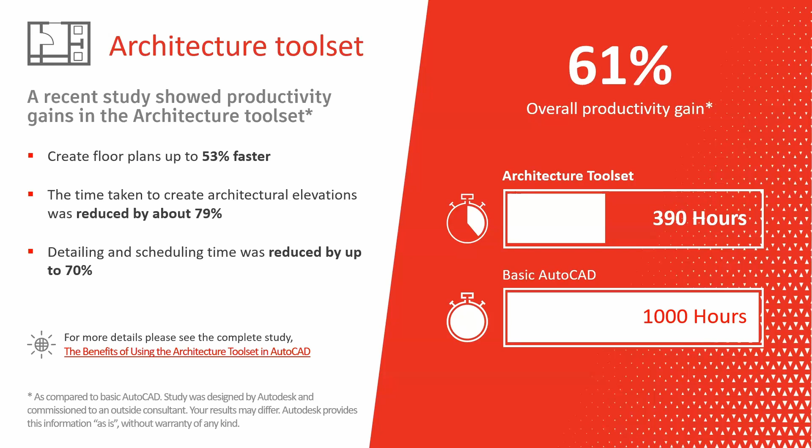So in case a company is mixed between these two worlds, construction and manufacturing, sometimes they need to create floor plans to put their machines in. It's good to have the industry specialized toolset because you have access to architecture tools and also mechanical things for your factory.

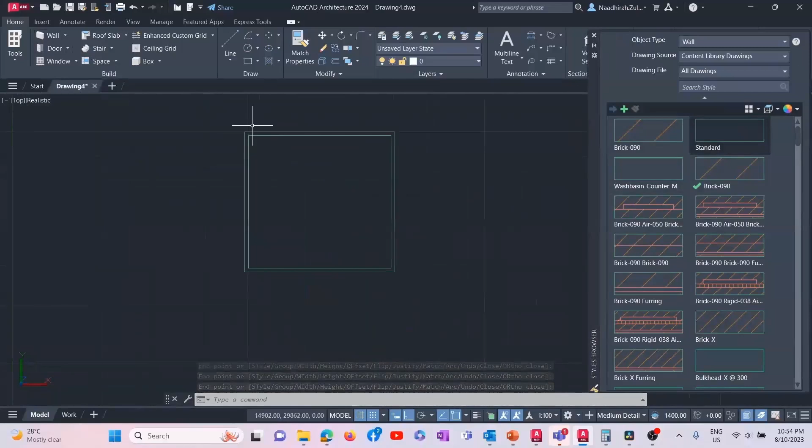So for example, this is the architecture toolset. Here you can see on top wall, doors, roof, slab, stairs, and all the libraries here in AutoCAD. You see the sizes of the door can all be arranged and changed, and there's a list of libraries.

Let's say you just want to put windows, put windows there inside. This is just like 2D, like you draw your 2D, but instead of putting in rectangles, you're putting in libraries, components. All of this is parametric, where you can change the size.

So let's say I add some internal wall. This one is the external wall, and then the internal wall is a bit thinner. You see there's auto trimming - when I add this door, it will be trimmed automatically.

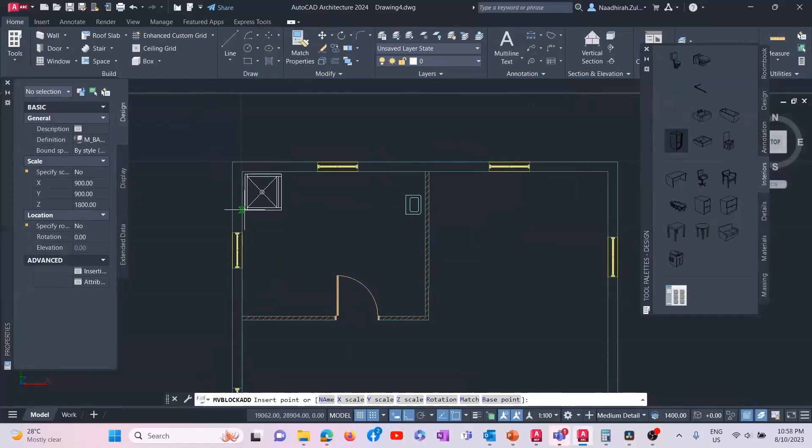And then put in some libraries. Let's say you're doing interior design or you want to add more details, you can also put in all these libraries, these so-called catalogs. They are online catalogs where you can browse for samples - for example, if you're building a toilet. All of this is available in the catalog, and from this 2D it's automatically converted into 3D.

So basically, when you're doing that 2D, it's automatically converted into 3D. This is just for floor plans - I won't go too detailed on construction and building. Just a simple floor plan, you can also get this, so you can put your machines in - whatever things related to your company in case you need a floor plan.

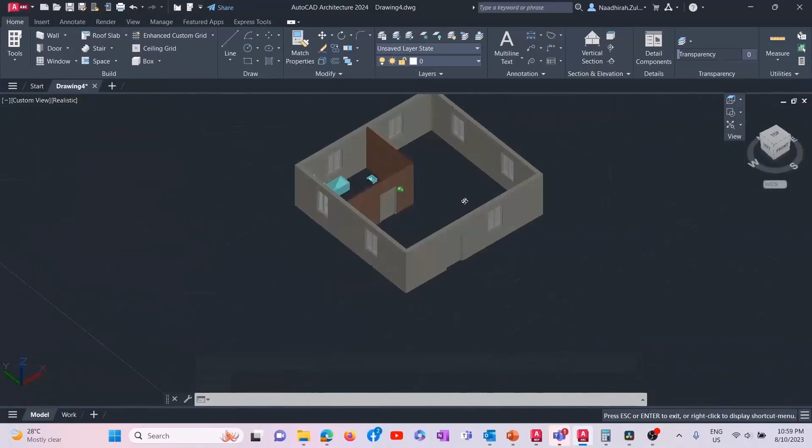Mechanical toolset. Now you get the concept of what AutoCAD industry specialized toolset is, right? Roughly understood a bit? All the features and functions are more tailored to the industry. Mechanical toolset can help you create GD&T dimensioning and all, which is more detailed than the normal AutoCAD LT. Standard libraries like bolts, screws, nuts are also available.

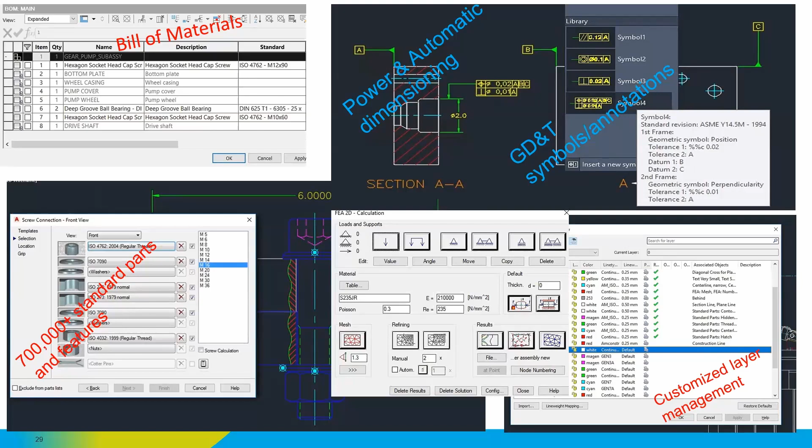You don't need to draw, everything is there. A simple calculation of load can be done, but it's in 2D, and automatic creation of bill of materials. If you use AutoCAD Mechanical, every part you put in, they will track. So later you can extract all the bill of materials or part list - you don't need to calculate manually. This is all, but AutoCAD Mechanical only has 2D.

So here is how it looks like. You can see up top here, it looks a bit similar, but they actually have things like contents, annotations, different. So let's say we go to view - here's the mechanical browser, like mechanical drawings. This is more like 2D, but mechanical drawings sometimes have multiple drawings inside as references.

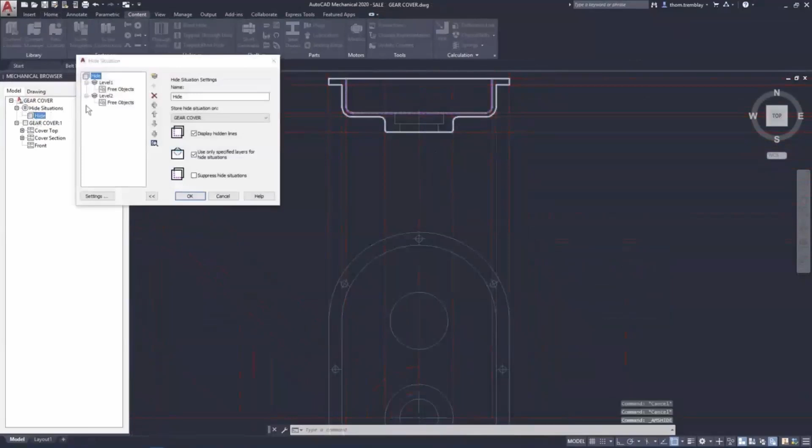They have their own browsers, so this can track like upper parts, upper assembly you put in, just for management purposes. And you see here there's more detail like construction lines - like hide situations, this is like automatic creation of drawings, mechanical drawings that have front and back, so the back can become a hidden line. AutoCAD Mechanical will help you automate that - you just tell it which one is front, which one is back, so it will automatically create the hidden lines. Let's say you move the two profiles around, it will automatically update too.

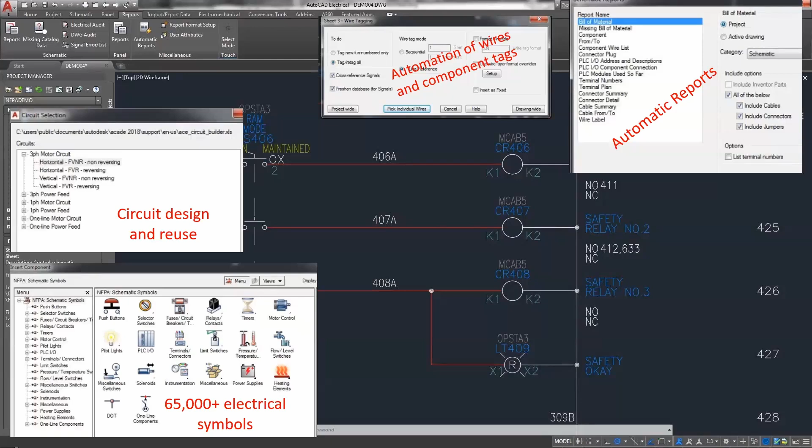Electrical toolset, same concept, but you have all this - libraries with maybe 65,000 or more electrical symbols. Later Nabil will show more details. There's automatic wire and component tags and wire tags here, and then automatic report.

Okay, and then Plant 3D, Nabil will cover Plant 3D, and also P&ID. So if you are doing plant or process or pipings, you maybe have to build schematic drawings. AutoCAD also has schematic drawings where you see everything schematics related, and all the libraries already there - pumps, compressors, all already there. This is Plant 3D. If you have AutoCAD full version, you have this. Just so you know or you don't know, this one.

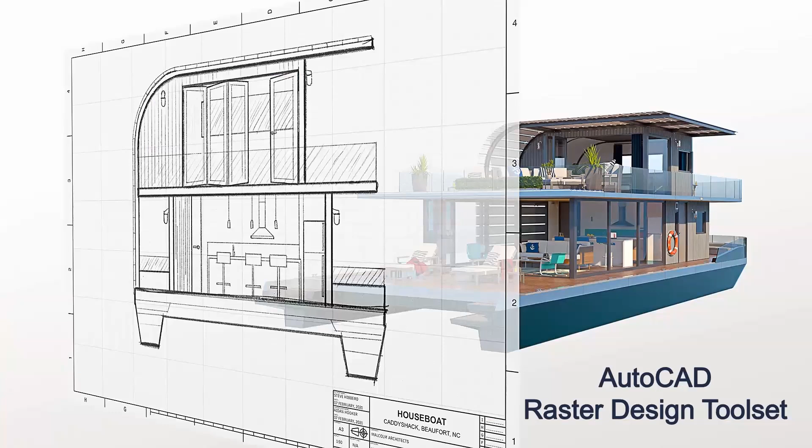Generations of ISO drawings. And then this is one where in the list of AutoCAD toolset, there are 7. This one is the least famous, the least famous nowadays, because it doesn't create drawings, but it actually restores drawings.

So let's say there are old, very old paper drawings that are damaged. Like if you've ever seen old drawings that are yellowed, the ink already cracked. So one way is we redraw everything. Usually we tell the intern, redraw. Give it to the intern, redraw.

It can't automatically convert because it's not a PDF from AutoCAD. You know AutoCAD can save to PDF right? This is not, this is from paper. You scan the paper, you can't automatically convert it. Plus the conditions are very bad, so you need to restore.

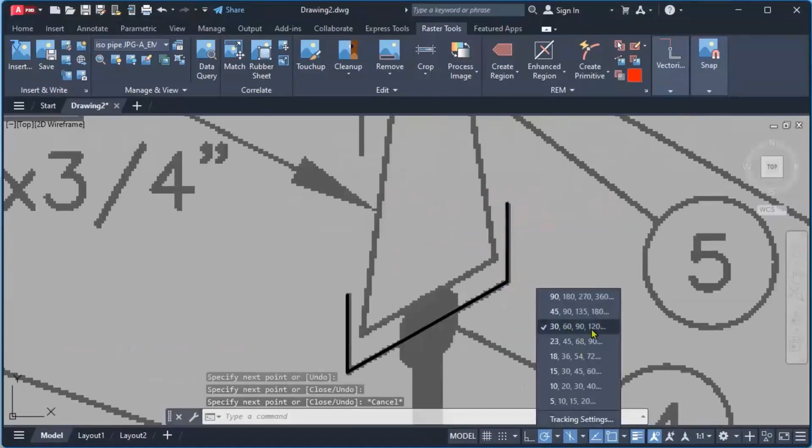Okay, a quick intro. This is from a scan drawing, a paper scan drawing. So Raster Design only helps you to detect all the endpoints. It detects the lines so it's easier for us to redraw back.

Sometimes we can automatically convert, there are options to convert too. We can convert the lines automatically, and text we can convert automatically to AutoCAD text. Some lines we can convert depending on the quality. Some we need to redraw, like in this case, we redraw. But we also have things like automatic convert.

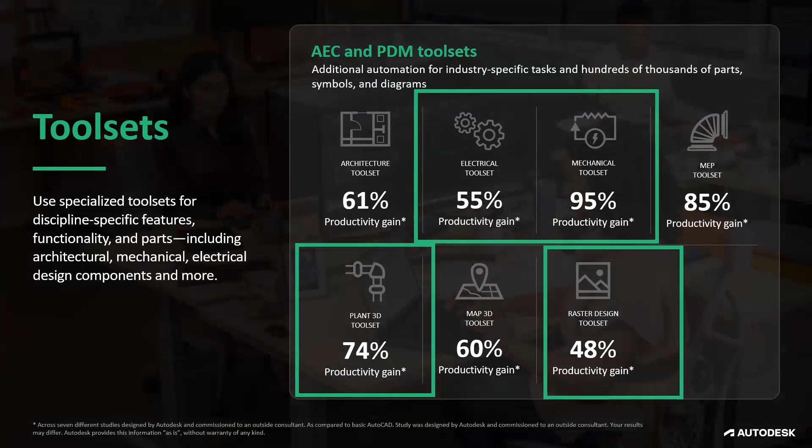So what this video is showing is one by one. So that is Raster. So in total we have 7 toolsets. So when you download and install AutoCAD, you have these 7, if you have the AutoCAD full version or AutoCAD industry specialized toolset. If you have LT, you don't see all this.

So how to use AutoCAD mobile and AutoCAD web? In case you want to know more, maybe we can talk separately later, because I already passed my time. So this is supposed to be a very quick overview only. In case you want to know more, we talk separately.

Okay. Questions? All good? Still okay? Yes.

Hand-drawn. So hand-drawn, if you use Raster, that hand-drawn you can scan as PNG. And some of it depends on the condition, if it's new. It should be - it's not auto-converting everything, but they can do the whole loop, you have to select which one to convert. You can't just select everything to convert.

Basically, if you have a 3D model created from Inventor, you can push it inside AutoCAD Plant 3D. I believe Seth already showed you the instructions for this. So this is one example. When you purchase the full AutoCAD, you get all of these specialized toolsets, and one of those I will share here is the Plant 3D toolset.

So why Plant 3D? I believe Seth also showed this. By all means, Plant 3D or piping design, you can actually create using normal AutoCAD. In the normal or full version of AutoCAD, you can also do 3D modeling, and you have the 2D tools to create schematic designs and so on.

But if you use Plant 3D, this will speed up the process of your creation for piping and so on. One benefit is an increase of 50% faster to create and modify, because most of the time there are tools or parts already provided that you can basically use.

You can also generate reports 66% faster, because the items included inside Plant 3D aren't just a model—you have information that you can fill in that can later be exported. So basically, these are the examples: you have 74% productivity gains.

For example, if you use AutoCAD to design a piping 3D model, it might take about 1,000 hours. In Plant 3D, this is reduced to 260 hours. So why does it save time?

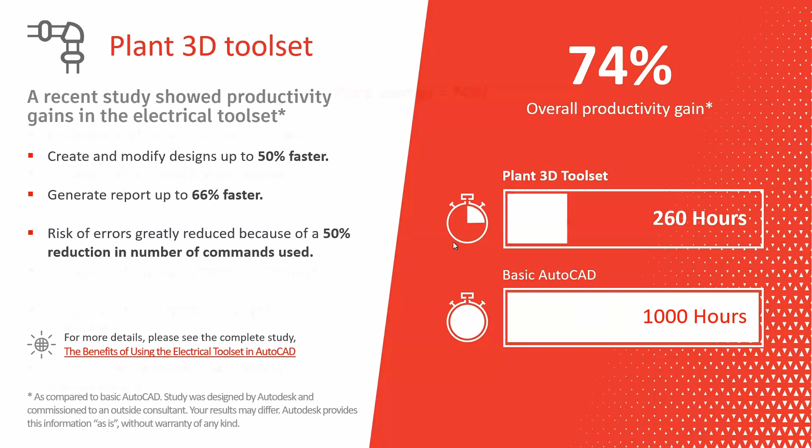This is just an example. First, we have the creation and modification of P&ID, which is the schematic 2D for the idea. By using this, you have a decrease of up to 42% in time.

When you create using P&ID, you can create it normally using normal AutoCAD to draw pipelines and so on. But for Plant 3D, they already provide tools you can just input directly—you don't have to create a sketch. You just fit in the icon, then use the line to indicate which piping connects to which area, and it will automatically do the process. You can create tags inside the line, so the lines and tools here have information that you can input. That's the first one.

The second one is the creation and modification of piping equipment and structures, which is an increase of about 50%. Again, you can create the 3D model, but same as with P&ID, you can click and drop only the part, and the piping is also easy to create—you just connect from one point to another point.

If you already have equipment included inside, you can just click at the nozzle point, and automatically it will create the lines. If you want to do some editing, this is also very quick to use—you can just pick one point, move it to the other, and automatically the pipeline will be fixed and fill in the interior.

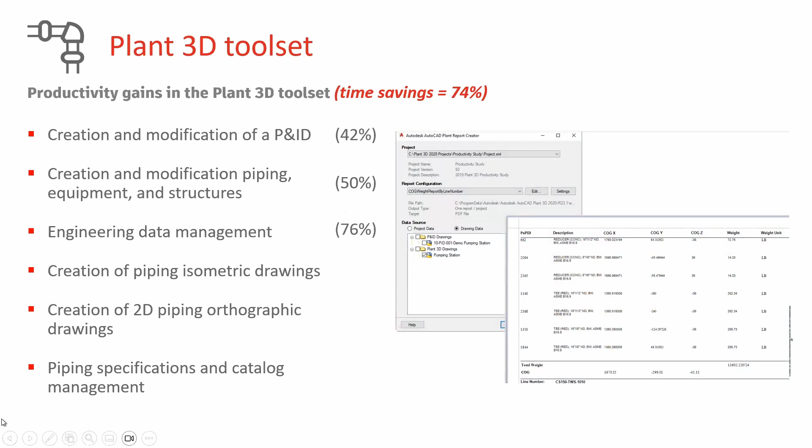Next, we have engineering data management, which is about a 76% increase. Like I mentioned before, we have the information or data included. And not only that—if you create the schematic from P&ID for 2D for the idea...

Then you want to make it into 3D. From the 3D piping, you can actually bring out the information you had before. So we have the list of items that were input for the schematic, and then you can just drag and drop into the 3D. With this, the information and reports can be created much more easily.

And then over here, we have the piping isometric drawing. So for example, the 3D piping that we created before, you can also convert it back into 2D. So for the pipeline, it's usually very difficult to use P&ID because that one is only for the ID only, for the isometric. So you can generate from the 3D before, and you can extract the information that you want. For example, able to find the pipelines, and if you have the pipeline with different segments, you're able to export, and you're also able to generate the BOM list quickly. So that is for piping isometrics.

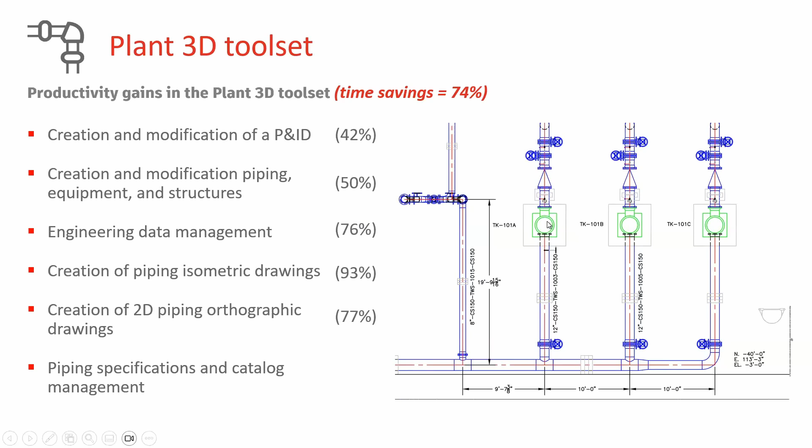So we have the same one with the 2D piping. This one is for orthographic. Basically isometric, and this one is orthographic. So you can also generate the BOM list for this.

And of course, for Plant 3D and P&ID, also comes with the piping specification and catalog management, where you already have that. Autodesk already provides the pipe, the tools, and so on, and you can just pick from there. If you want, we have the spec editor so you can add your own equipment, create your own equipment, then later on this one can be used directly inside AutoCAD Plant 3D.

Right, so pair it with Inventor. What does Inventor do? Plant 3D can do 3D modeling, and some of this equipment has already been provided, but Inventor can do much more detailed design, and it's much more quick and easy to create.

So one of the examples of using Inventor is that it has powerful 3D modeling design, so it's very flexible. Anything that you create, you have the history of what you've created before. So if you do sketching or editing, you have the history list that you can go back to and modify later on. That is something that AutoCAD cannot do.

The next one is the assembly level engineering tools. Inside AutoCAD, usually you design one part and all the parts get combined together. Whereas inside Inventor, you design parts separately - maybe part 1, part 2, part 3 - and then you can combine them into one single project file. And again, it can also generate the 2D drawing, but we can just leave that to Plant 3D.

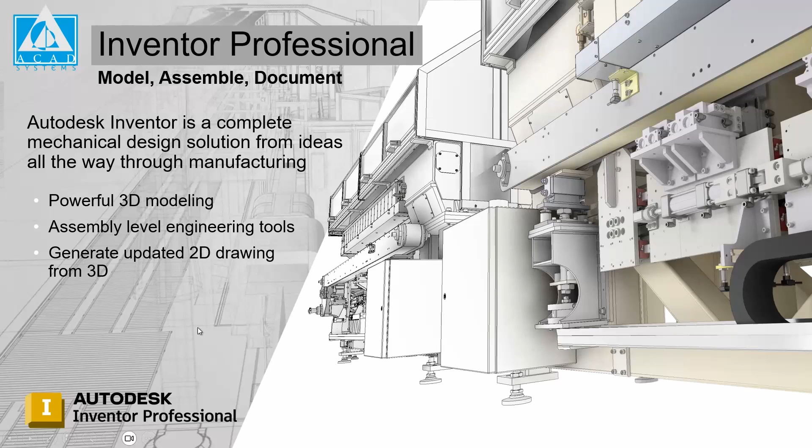And the next one is we have the frame design. Plant 3D also has something similar for frame design, more focused on structure, but in Inventor it's much more flexible - you can edit it easily. It also allows you to trace which beam member you have included.

And lastly is the tube and pipe. You can also do tube and pipe in Plant 3D, but for Inventor, sometimes when you design an equipment, that particular equipment needs to have a tube and pipe, so instead of doing that inside Plant 3D, you can do it early on with Inventor. As just an honorable mention, if you want to do weld design, Inventor also provides that. We have sheet metal and also cable and harness, but that's basically more on the electrical side.

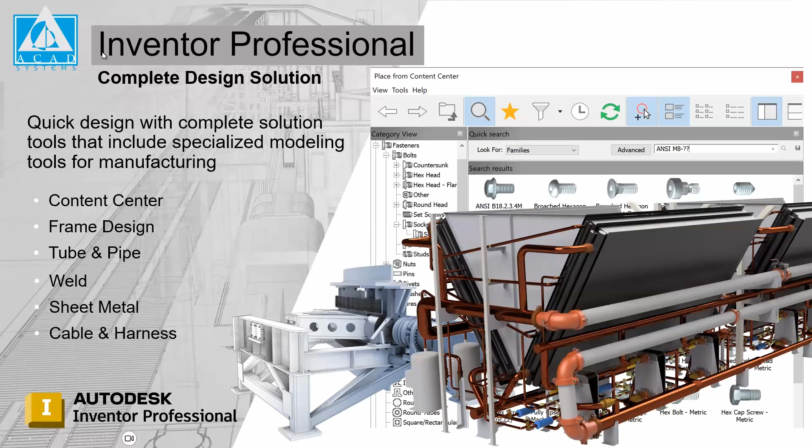To combine them together, we have BIM interoperability inside Inventor, which allows Inventor to take their models, compress them, and transfer them to different software. What it does is allow you to add some information inside, such as the auto beam object, and then configure it so it fits nicely into other software. You can also input configuration so that when you add this model into other software like Plant 3D, it knows which are the pipe locations, ducting, or electrical connections. That is some of the things BIM interoperability can do. Right now I'm just showing you examples.

For example, if you take a look here, we have a very complex model from Inventor. If you try to do this modeling inside of AutoCAD, it can be very difficult and very hard to create. But from Inventor, you already have all the tools required, so you just need to create and pick and drop.

But if I would like to bring everything here into Plant 3D, this can be very difficult because we have so many parts. For example, we have small parts, bolts, screws, nuts, electrical wiring, pneumatics. So most likely you don't want to bring everything.

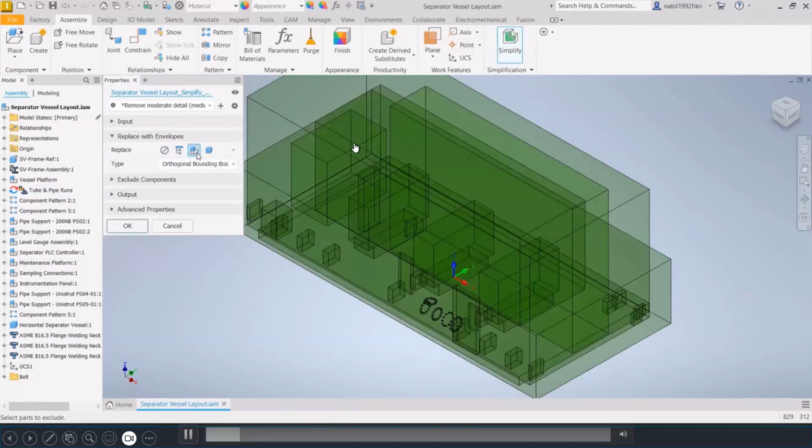For example, let's say I would like to convert everything into blocks, or maybe each part will be a separate block. So that is some of the things that you can configure.

Maybe I don't want that. I just want to remove some of these small parts. If you take a look, we have some railings, bolts, screws, nuts, very small parts. You can filter those out easily by using this exclude part by size option. You just need to include the size that you want to reduce. For example, 10 inches, so Inventor will find all the items less than 10 inches in size and remove them completely. So you don't have to select everything one by one.

But you also have the ability to select manually. I can just select some of the tools that I don't want to bring. If I find some mistakes, I can also undo that, so I can trace back what items I have excluded, and then bring it back.

So that is the remove parts feature. For example, if I would like to make it much more simple, I would like to remove some features, like holes or fillets. Inventor allows you to detect which areas have holes, which areas have fillets, and you can basically suppress them so it becomes much simpler.

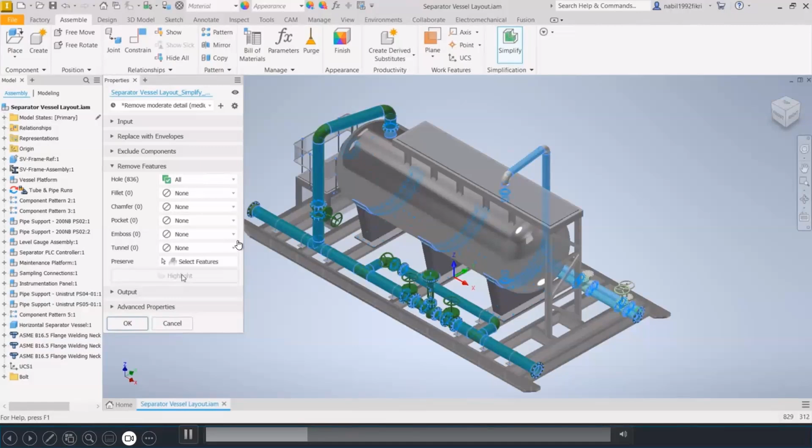For this case, I basically just simplify everything, but you can also preserve some of the areas that you want to keep. You can just select them.

Let me just skip this part here. So for the output, I can specify whether I want these to be separate parts, or I would like to make everything combined together into one solid object. But you can also do something like that.

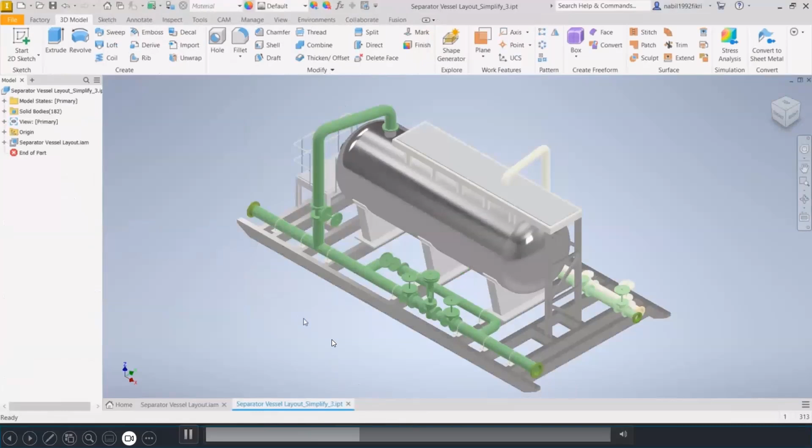Once I'm done, now the project is ready to be sent easily. Then I can just go and use the BIM interoperability that already exists inside of Inventor. Over here we have the BIM. If you take a look, we have the MEP connections, which allow you to select which equipment or parts have certain criteria.

For example, here I need to have piping, so I need to tell it that this model has piping. Later on, when I bring it inside Plant 3D, Plant 3D is able to detect the piping here, and I can easily create the pipe connection from it. From here I can input some information, like what type of piping this is for, and what the connection types are, and so on.

But this is basically just repetitive, let me just skip this part here. Basically, I'm doing the same thing.

Other things you can also configure for building components. For example, if I want to bring it into other software besides Plant 3D, I want to make sure that what I see here is exactly what I see inside of Plant 3D. Sometimes the orientation can be flipped, or the angle is not correct. So this is where you can configure it first, so that when it's included inside Plant 3D, it appears exactly how you expect.

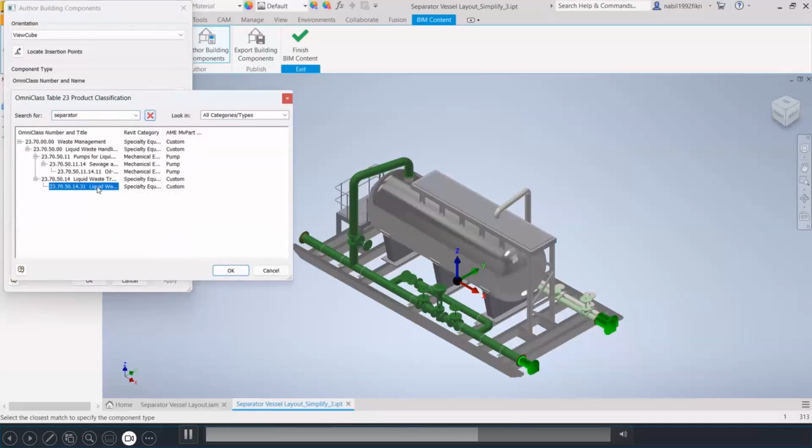You can also input the product classifications, and include other types of properties, maybe model properties, though for Plant 3D this might not be needed. I can also include descriptions, and this can be seen when I add it inside Plant 3D.

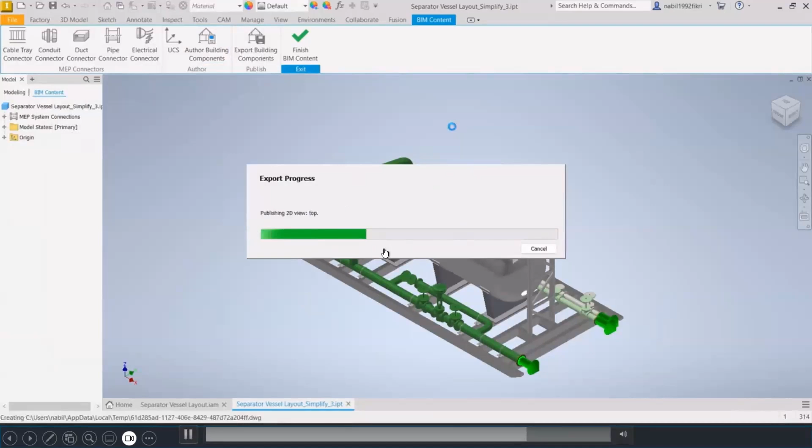So everything is done, I can exclude this component and export this building component here. Once you export, it will tell you the information you added before, automatically creating a report for you. This is useful since maybe the person receiving it isn't the same person who uses Plant 3D, so when I send it to other people who use Plant 3D, I can tell them what information I've added for this component.

You can see the report has been generated automatically. This is the list of information, so the next person who receives this knows exactly what you have done for the component.

The reason we want to simplify first is, first of all, to protect your components and your designs, and the other reason is to make the project lighter so it can easily be managed on other software.

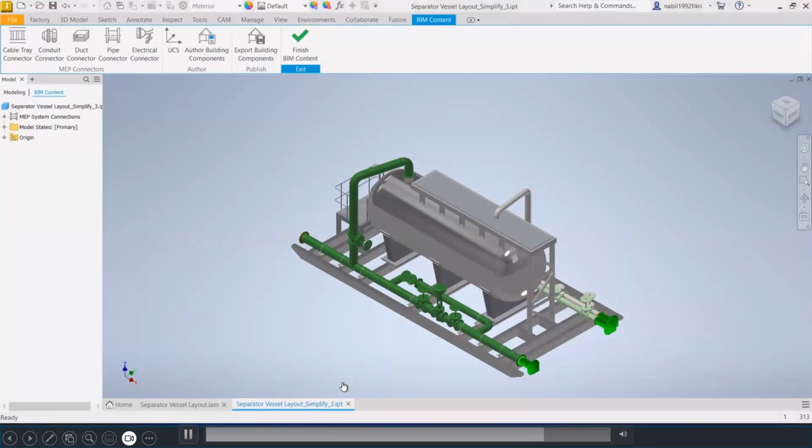From the plant itself, you can see we have piping, components, and equipment. These can be added easily using this tool palette here. We have the piping creation tool - you just pick and draw the line here, and it will automatically create a part.

The connection is also very easy. For now, let's say I want to bring back the Inventor files, so I can bring them from the Inventor equipment right here. You can see I'm able to add the component just the way I see it from Inventor. If I take a look here, it tells me the description of this item - we have this water separator that has been added from Inventor.

If I take a look at the piping locations I created before, Plant 3D is automatically able to detect that there are nozzles you can create from this area for the piping. The piping can be created automatically using the BIM.

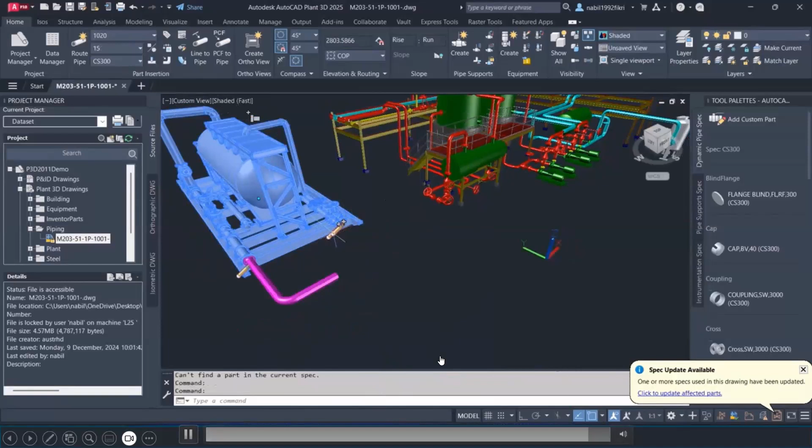So this one is just for the connection between Plant 3D and Inventor. Any questions so far about this session here?

Any questions about Plant 3D or maybe Inventor? I believe there are no questions so far, so we can proceed to the next part.

Before, we already took a look at Plant 3D, so now we take a look at the electrical side. What we want to do here is connect from electrical AutoCAD Electrical 2D into 3D design of mechanical with Inventor 3D. We want to connect these two. This one is also electrical, which is part of the AutoCAD specialized toolsets.

Again, why use electrical toolsets instead of AutoCAD? You will have very high productivity by using the electrical toolset. Most of the time, people who design schematic designs for electricals like to just bring the items and put the icon there instead of redrawing from the beginning.

So when using the electrical toolset, there's less need to create a sketch - you just need to create an icon and then put it inside. We have an 84% faster design creation because everything has been included, all the parts, all the icons, JIC, and so on. It's already been provided, so we have the library there.

You can also edit designs very quickly, and this is basically the productivity gain - around 95%. So instead of creating everything from scratch, you just pick and drop and you have the electrical design there. So how does the electrical toolset save time? First of all, we have the comprehensive symbol library.

The symbols are already provided. If you have your own symbol, you can create it and add it inside this library. You can see here we have the JIC, and you can also select between different types of symbol libraries, maybe NFPA, JIC, and so on - that one is already provided.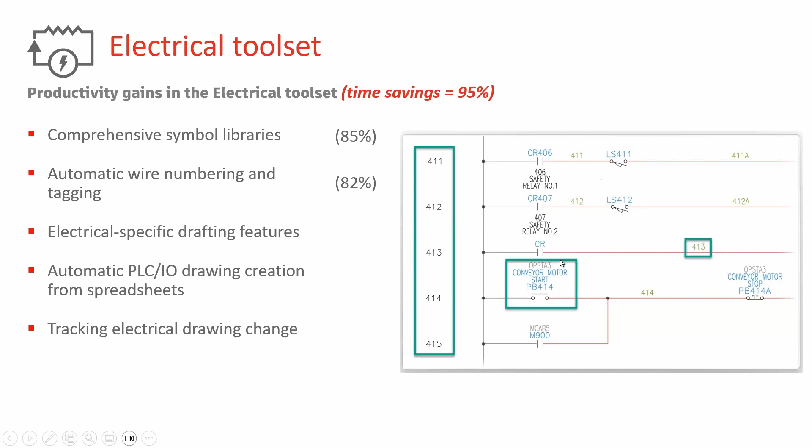Right, so we have automatic wire numbering and tagging. Most of the time when you create electrical, you just need, for example, this ladder here for wires. With the tools here, I just pick from the symbol library and drop it in, then add some information. Once the information has been added, the tagging automatically creates. For example, here we have the CR component, and it's also telling you which is the wire number based on this component item. So with this, we also have electrical specific drafting features.

Most of the time when using electrical toolsets, you will be less likely to rely on the regular version of AutoCAD sketch, because electrical has its own intelligent properties inside. So you can basically modify the tools that you have quickly.

And we also have automatic PLC drawing creation from spreadsheet. Basically, if you have data created from Excel files, you can bring it inside of electricals and it will generate this design of PLC automatically. You can also export it out if you want to.

And lastly, we have tracking electrical drawing changes. Usually, when using electricals, you create a project, and that project can consist of many types of drawings, let's say drawing 1, drawing 2, drawing 3. These drawings can be interconnected between each other. Some of the symbols may appear on drawing 1 and the same symbol on drawing 2, and this type of symbol is connected. So you can track this easily by using AutoCAD Electrical.

For example, here, if I have this component, I can trace where it's available from. I can see it's also available on a different sheet or maybe the same sheet. So we have a list of the data here.

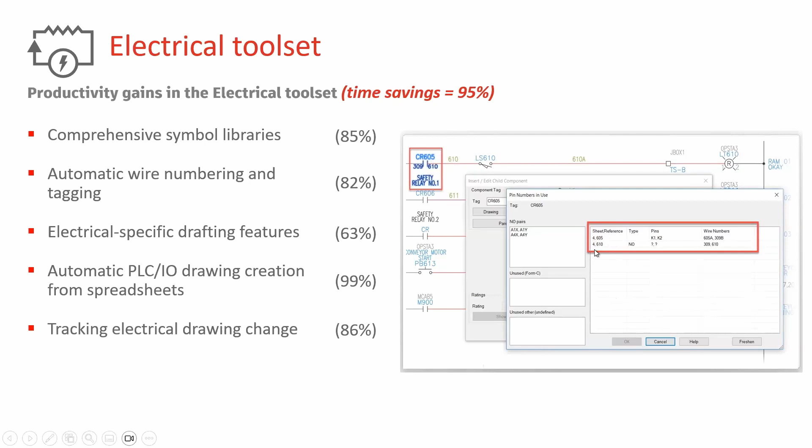Now, connected with Inventor. Inventor also comes with cable and harness, so you can do electrical design from AutoCAD, and you can also do electrical design from Inventor, where 2D drafting is created from AutoCAD Electrical for schematics and ideas, and to make it a reality is where you use Inventor. So this can work separately, actually.

But once you work separately, sometimes you want to merge or sync these two pieces of information together, and later on we can connect by using electromechanical. So what Inventor can do is create cable and harness, because cable and harness comes with a library of wires you can just use. We also have automatic routes - when you connect from one point to another to create a wire, you can end up with very messy designs, and this is where you can tidy up by using the automatic route, so the wiring follows a certain segment that you want it to go.

And then we have the nailboard environment. If you've used electrical before, usually what people did in the past is measure the line length - they would take the entire wire segment, put it into a board, and measure from that. So this one is just a harness library.

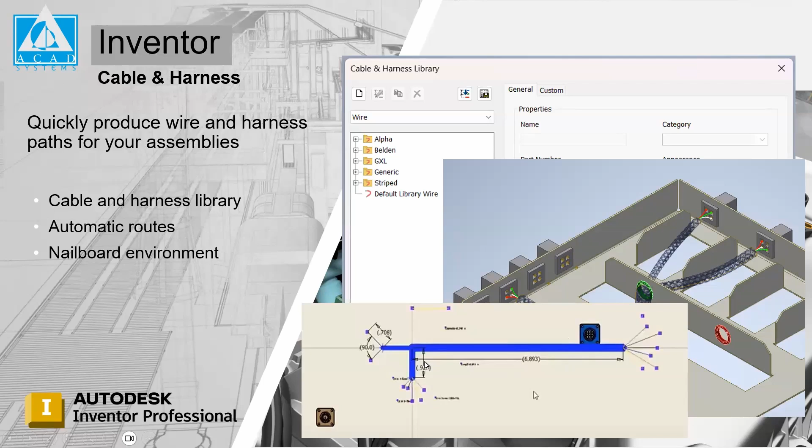Now, electromechanical - this is the tool that allows you to sync. It's available inside AutoCAD and also inside Inventor. It allows you to link two of the same components - maybe one you create as a schematic only on electricals, and the other, the same component, on 3D in Inventor. So you want a link between these two, and you can use electromechanical. Route cable is basically the Inventor 3D, and schematic is basically AutoCAD Electrical - you want to combine and merge these two.

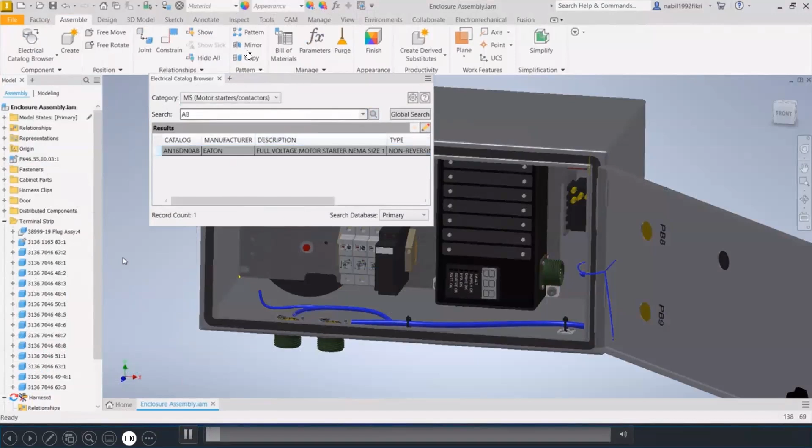Okay, so now let's look at an example using both AutoCAD Electrical and mechanical Inventor together. Here I have the mechanical parts, and I'd like to bring in some electrical components. You can find these from the AutoCAD Electrical libraries or the catalog browser. I can search by manufacturer, for example Allen Bradley, and just click and drop these items in.

If you don't have the model yet, you can also create your own model and then add it from the library. But for this time, it's just basically for assembly, so let me skip this part.

Next, I can go to the top here where we have the electromechanical link setup. What I do here is create a data link that can be read inside of AutoCAD. Let me skip this part, so for example, I save it on the document, and once I'm done, I'm able to see a library list of the items that I've synced.

If you take a look here, we have the location view, which shows the electromechanical parts. Here we have the Inventor parts, and it's able to tell you the list of what part is actually from Inventor or maybe from AutoCAD. I don't have an AutoCAD file yet, but what I can do is fill in the information so that it will have electrical properties inside. Let me put this part here.

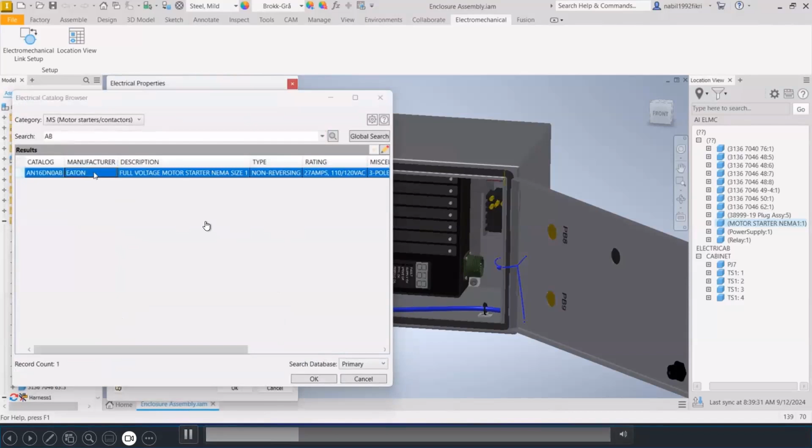This is basically just filling in the information, so I can trace back from the catalog, and automatically it will select the information about the catalog. Now what I do here is just save the link, save the sync.

So if I go back to the electrical one, we'll have the same tools. If you click here, this is the same tools that we have before inside of Inventor - we have the electromechanical link. I can create a new one from here, but for this case, we already created it from the Inventor side.

The electromechanical link basically works two ways - either you start from AutoCAD or you can start with Inventor first. Either way, I can just pick the data that I have from the Inventor, and you should have the same location that you see from here. So we have the parts from Inventor and from AutoCAD.

If you see here, we have the symbol for the Inventor part, and we also have the symbol here for the electrical part. This is the new part from Inventor that we just added, which is the motor starter here.

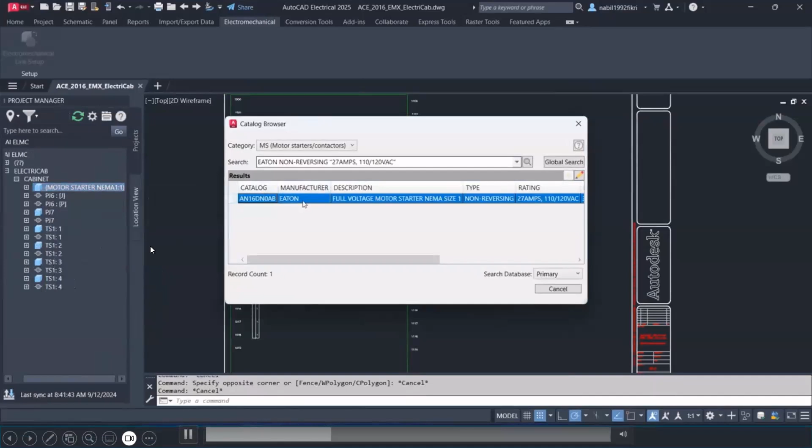I can also add a new component from AutoCAD Electrical, and bring it back to Inventor using this sync. This basically puts the motor starter inside for electrical, just to have a link between these two. So for example, if we have a motor starter here in Inventor, but once I put it inside of electrical, then you will see the link between these two.

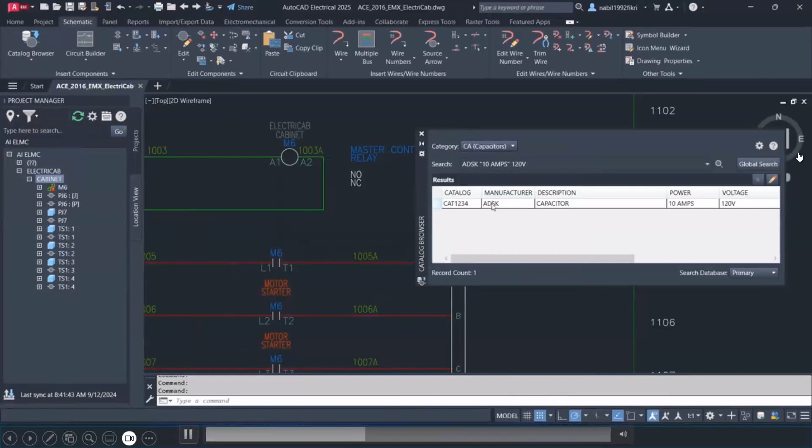So now electrical, AutoCAD, and mechanical are synced together. This is basically one part item. I can do the same thing - add a new part from AutoCAD Electrical, and go back into Inventor. Let me just skip this part here.

If you take a look here, this is basically what you do inside of electrical. You put an icon here, and this will be the list of information that you can input. Normally, if you try to do it using normal AutoCAD, you have something like this, but you need to create it manually - that's what we call an attribute, so you need to create everything. But for electrical, it's already provided - you just need to put in descriptions and catalog data, so this list is already available.

Okay, so the part has been included over here, so I can just go back to Inventor. Let me skip it. For Inventor here, I can sync, and now I'm able to see not only the Inventor part and the synced part, but I'm also able to see the electrical part now - the one that we synced before. So we have two symbols here - one for electricals, and one for the Inventor part.

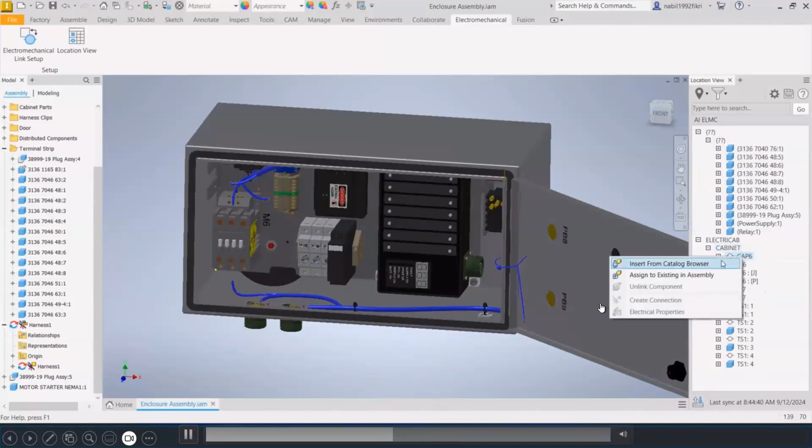If I want to, I can also bring electrical parts inside of Inventor, just like we did with the electrical from the Inventor part.

Okay, this one is basically just connecting. Let me just skip this part.

We do have the electrical part here as well, but it's not actually connected, one part. If you take a look here, we have the same item, PJ7, over here. We also have the PJ7 for the Inventor. We have PJ6 from the AutoCAD symbol, and we have PJ6 for the mechanical as well. So what we can do is link together between these two. For example, this electrical part here, I want to tell inside of Inventor this is the part that I want to link with the Inventor part.

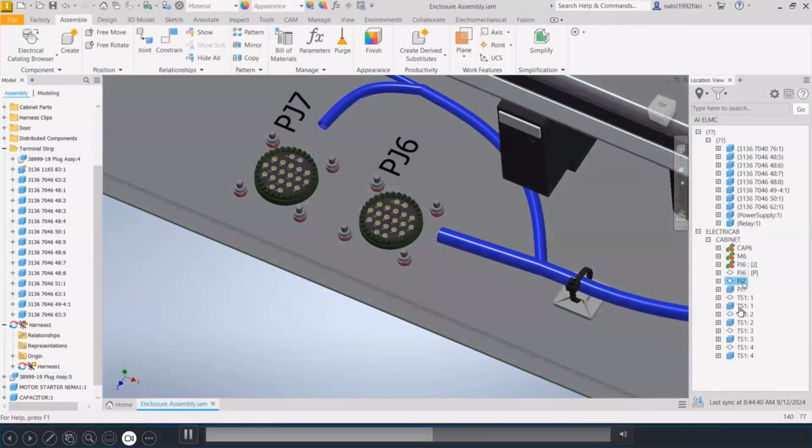So we have two PJ7s. I want to make sure it tells that both of this is actually one item. Now you see that we can actually link them together. I can do the same with the electrical part. This one I create from the Inventor, so I can go back to electricals because maybe I don't find that component inside of mechanical. So I can find that from electrical as well. I can find the Inventor parts, then I can link with the AutoCAD symbol here. So that is just linking between these two.

But if you take a look here, we still have some exclamation marks, which indicate there is still something not yet complete, right? So the electrical mechanical also allows you to trace whether you have finished the design or not. So anything you haven't finished will basically show you based on this icon here.

One example here that I haven't done is that we have the wire connector inside of AutoCAD Electrical, but we actually did not have yet this connector inside of Inventor. But this is something we can actually do easily.

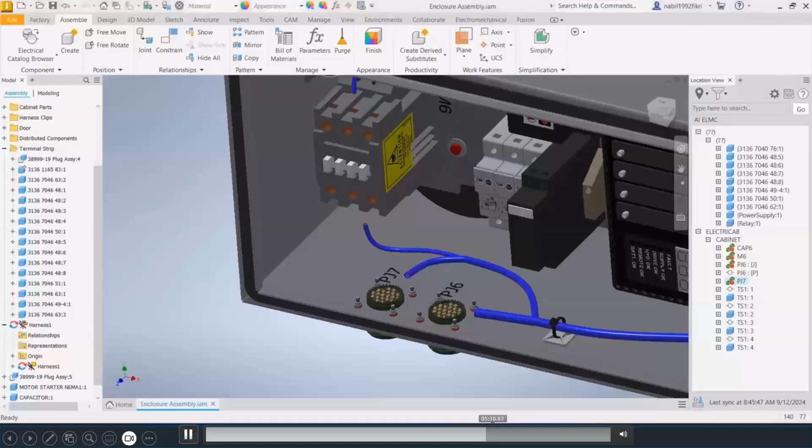So let me just skip to Inventor again. If you see here for the syncs, everything is synced together, connected. Now I just need to bring the information about the wire connections from the AutoCAD. So not only that, the single type of parts here also have a pin which allows you to connect wires to wires. So there is pin data inside, and the same with the Inventor and also electrical parts, it allows you to quickly create connections automatically.

So what happened here is that you can create this one manually, but this one I can just find the data from the AutoCAD, and Inventor allows you to route automatically between these two points. Basically, this is data that they actually read from AutoCAD Electrical, and then they just do it automatically for you.

You can also do that the same with the electrical part. For example, if I create new wires inside, then I can also bring it inside AutoCAD Electrical. If you take a look here, the wiring is quite messy inside of Inventor, but we can create wire segments to allow you to tidy up the wiring inside of this equipment here.

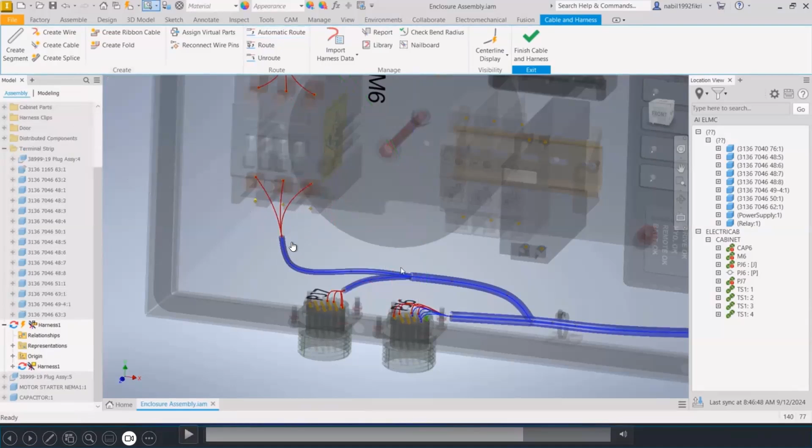For example here, we create the wire segment, the blue color here. This one is not just a wire, but a segment to ensure that the wire will follow inside the segment, and this can be done automatically. You just need to select the Automatic Route, and the wire will intelligently find the closest segment that it can follow and automatically go inside. But actually I did not select this one manually, this is automatic, we just put on the closest one.

So this is just an example from Inventor. If I want to create new wire, I can also do that. Inventor also provides the ability to create electrical design directly from Inventor without relying on AutoCAD Electrical as well. For example, I create this new wire here, and I can bring back this information inside AutoCAD Electrical.

Let me just move forward for the electrical part. So this one, I still have some error message here. I can use this detail or connection just to see what are the things that I'm missing, so you can trace back your error message easily from here.

Okay, so let me just go back to AutoCAD Electrical. So same again, I can do the automatic wirings inside, same as I did before inside of Inventor. So wiring, and you can see the wire is created automatically.

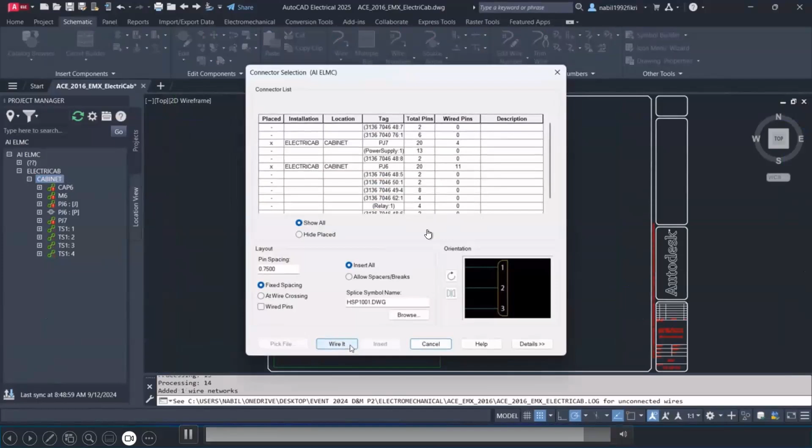Another thing you can do from here is bring data from Inventor. Inside AutoCAD Electrical, where you design a schematic, usually you don't know the actual length of the wire, because you just need to make sure what point connects to what point, just basically an idea. Inventor is where you make it a reality, where you can see the wire length, where you can see where the wire goes.

But once you sync, you're able to see the wire length from AutoCAD Electrical as well. For example, I need to bring the length from Inventor. Okay, so now I'm able to see the wire length, this is the information data from Inventor. So that is basically about the electrical mechanical designs.

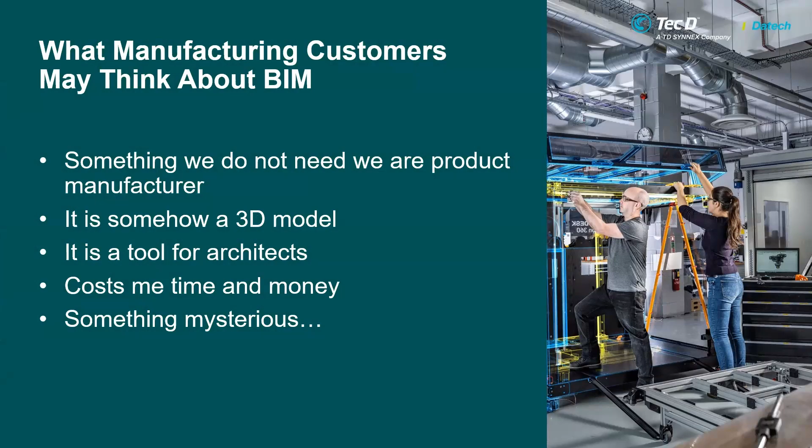Okay, BIM content. So what might manufacturer customers think about BIM? Usually, or previously, manufacturers think it's something they do not need, it's extra effort but they don't need it. It's somehow seen as a 3D model tool for architects only, not manufacturers. Just costs the manufacturer time and money, or maybe something mysterious. But I saw everyone's answer yes, so I assume everyone knows what BIM is. So what is the manufacturing component in BIM?

Okay, so things like building equipment or building products. Elevator, lift, HVAC system, this is also considered a building product. This is all designed and manufactured in a factory and installed in a building.

So you may wonder how your products or equipments relate to building. Just think of it like Lego. Your product needs to fit inside a building, and you need to make sure it's not clashing with any beam, any doors,

or any other building equipments. Custom fabrications, all this is manufactured. There are companies who manufacture this - all the custom facade, building equipment and layouts, all this steel inside a building or inside a factory with all these equipments, machineries. Modular constructions is also now a trend where people are building a whole set like a Lego and just put there. And then MEP engineering,

all the piping inside the buildings, like the waste management system of a building, where you throw rubbish and where the rubbish will go. And then inside a building also have things like the flow of aircon cooling. So like now the aircon is here - did it reach your side over there? Is it cold your side? So this is all considered as one part of manufacturing as well. Whoever supply the aircon needs to make sure that this aircon is cool enough to cover the whole room. So should it be placed here, placed there, or where is the most optimized location?

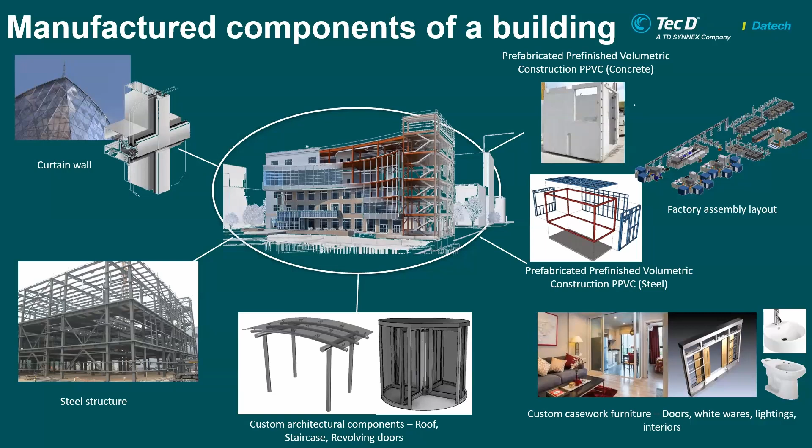So a bit more detail into a clearer example. Things like in a building, you have curtain walls - so all this is manufactured, right? Steel structures - there are companies who design, of course architects design structures, but it need to be manufactured and fabricated. So like custom architecture component, roof, staircase, doors, custom doors - all the doors here you see, this is all manufactured. Toilet, prefab - this is all manufactured.

Prefabrication and productization - so now you've seen earlier is prefabrications. This is a product, I mean people are actually selling this as one product. So this is a whole product, a whole set for maybe 5-story buildings to cover the range of power and cooling and so on.

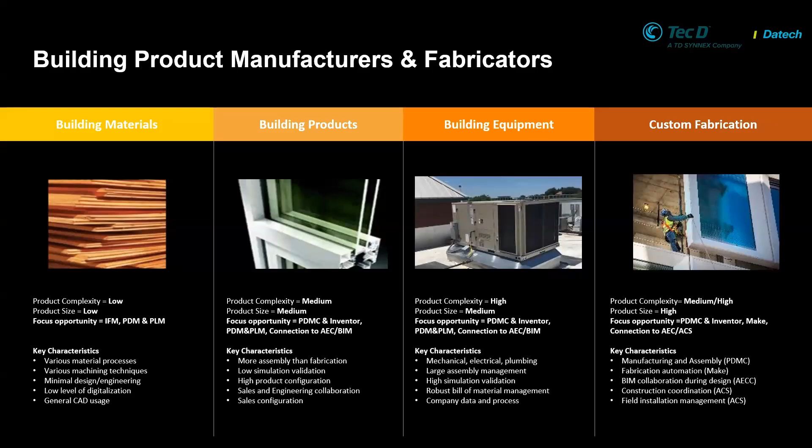If we go a bit more into details, so you can be under building materials, building products, building equipments, or even custom fabrications. So anyone in this field? At least touch a little bit here and there. Industrial machinery - so all your machines inside a building or a factory.

So now we go into Inventor. Do you know Inventor can open a lot of file formats? If you use Inventor, you probably clicked open before and saw a lot of file types. What is the difference between Inventor and other products? Other products also can open many file types. But Inventor has the technology called AnyCAD, where it can open all these file formats and maintain the associativity of that file format. So for example,

Nabil is modeling something, this equipment, with SolidWorks or other third-party software. So I use Inventor to open this. In the meantime, let's say Nabil is working on this component or equipment, updating something. Once he saves, me who opened this equipment in Inventor will also get an update. So that's an easy way to explain it. Inventor maintains the associativity - it's not converting, it's open and maintain the associativity.

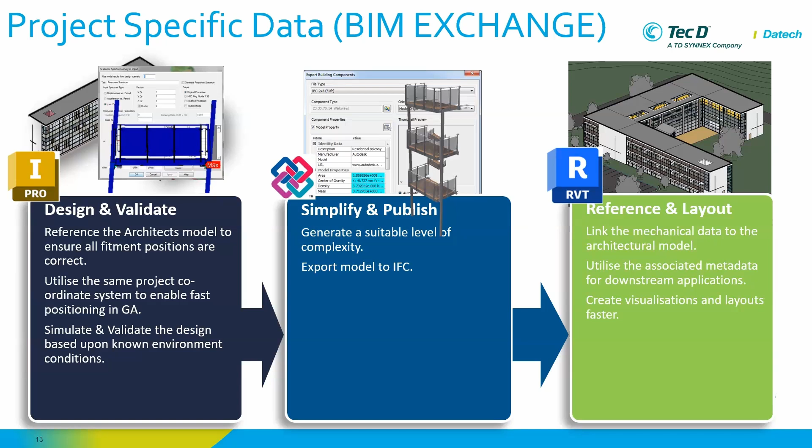Okay, let's say after we open up Revit and want to put in our equipment, we will not send everything. So as Nabil explained, you simplify, right? Before you send over or make it a Revit format, you need to simplify so that the file becomes lighter, because the architect or the Revit modeler does not need a very detailed model. They do not need to know how many screws are in the equipment, how many beams, whatever. They just need to know it comes as one piece, one assembly or one equipment. Simplify it, then reference it and send it over to Revit.

So there's also a thing called LOD, level of detail, where of course in Inventor our target is to make sure it's one-to-one, so every bolt, screw and nut is in. But in Revit it's different, we need to simplify it.

So you can treat Inventor as a medium to be in the workflow, or let's say if you use Inventor to design your equipment, it's much better. Why is it much better? We'll see more later.

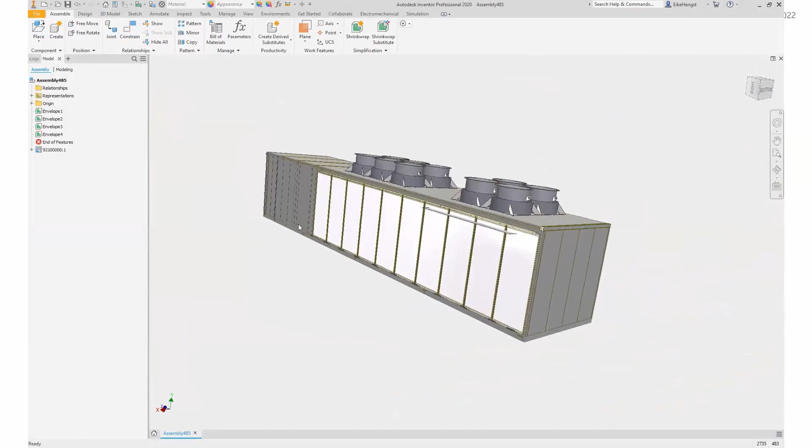Simplify and publish BIM content. So for example, this is our equipment. In Inventor, we just simplify the things, so we do not need to know how many panels are there. We simplify it to make sure that it's like just a box or envelope. We can just hide everything, so in Revit they do not need to know the details. We just got the shapes and also the inlet and outlet.

So in this case, the inlet and outlet are the pipe connectors. We specify where the pipe connectors are, the diameters, and the system type, so that all this will later be shown in Revit. So let's say this is unit return, and then of course we specify UCS as the origin, and then we can select the classification.

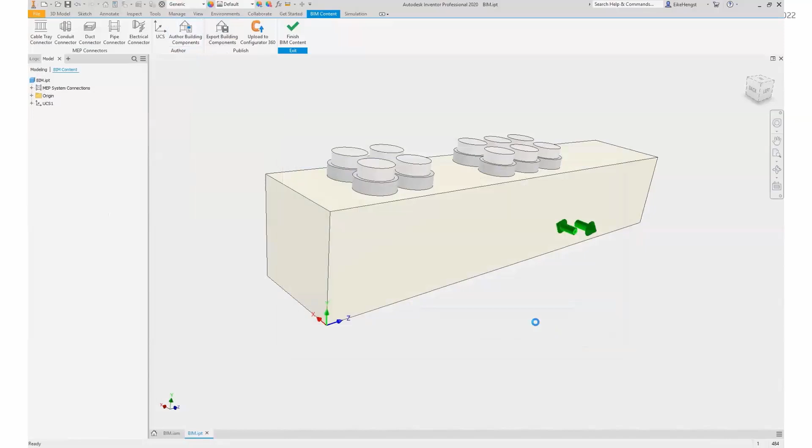Of course you can skip this, but if you want to add more details, you can also add more details here. In the case where you don't want to share too much information, you can just straight away skip this and export. So this is exporting to the file format RFA, the Revit family. So it's exporting, okay, so this is okay.

Now in Revit - so this is Revit. Let's say after we inserted the equipment just now, all this connector is usable. From Revit, we can insert pipes and everything, so it's not just one dummy shape there. It's an equipment that we can use in Revit. So that is one way where we send over our file as an RFA, or Revit family.

We can also use Revit to Inventor data exchange, where we can send over our Revit model, the building model, over the cloud. You don't have to save it locally, put it in a thumb drive and pass it over - you can send it over the cloud.

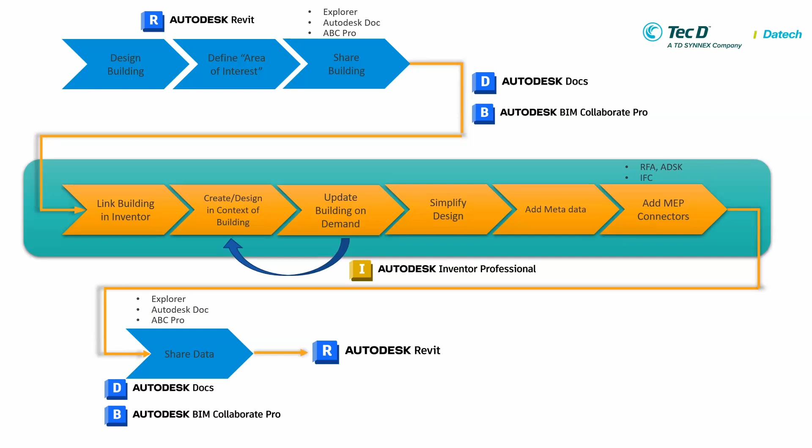Example, I believe most of you are in this blue box over here - this is the thing that I explained earlier. So let's say from Revit, they just need to define the area of interest. A building is very big, right, so you don't have to specify the whole building. You just specify the area of interest. Let's say I want to insert my lift inside this building - I do not need the porch, the room. We can just specify the area of interest and share only that area of interest. Then it comes into Inventor, we link it, insert our content, update, simplify all this, and then send it over back, all through the cloud.

Here is an example. This is called Revit Data Exchange, started in 2023. So from Revit, I can just specify the area of interest, save it to the cloud, and specify the area of interest - this is all in the cloud. Let's say we specify - this is a factory, by the way - so the area of interest is this. Save it to the cloud, to the location where we can collaborate.

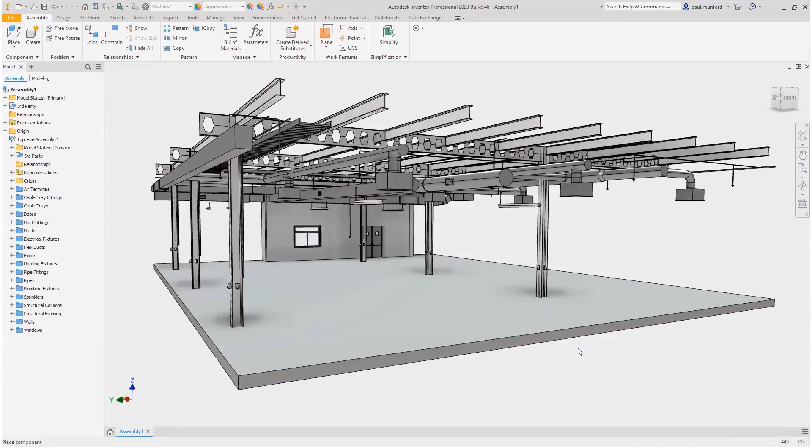So now from Inventor, I open it up also from the cloud. This is the area of interest that has been assigned to me, so I can open it up. So it's imported in - inside Inventor, I just add my equipment or my machines into the structures.

Okay, so in case there are some changes in the Revit model, those who use Revit and who use Inventor to insert their component will also get updated. So you will reduce a lot of last minute changes and updates.

So challenges in this building design is architects want to design the building all very nice, very sophisticated, right? You know Malaysia have many box buildings, right? Just recently there are many buildings with all kinds of shapes. So architects can design all that fancy stuff, but can it be manufactured? That's another thing.

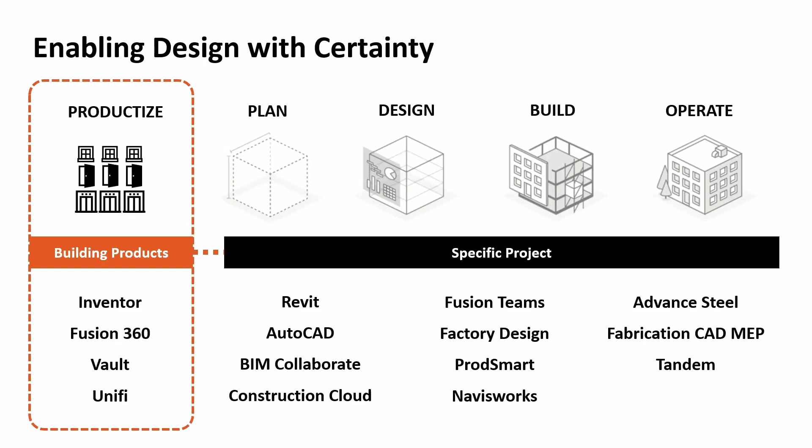So we can supply across all the process. So Inventor is all here. We supply to all the other life cycle stages.

Anyone familiar with design automation in Inventor? Or iLogic in Inventor? Not sure. Okay, so you know how equipment has specification, right? Variations of size and specs.

So you can automate that. You design one equipment, but you can change the variations at the click of a button, and it will auto update. That is design automation in Inventor. So if previously what I showed is a static model where you design it and send it like this, now we can also send it over as automation designed with multiple sizes. So customizable product family - this is from Inventor.

And then go over to Revit family, from engineer, from product engineer. So we publish, and then the building designer will take our models and start their building models and build up. So it's like we are sending in a catalog for them to choose.

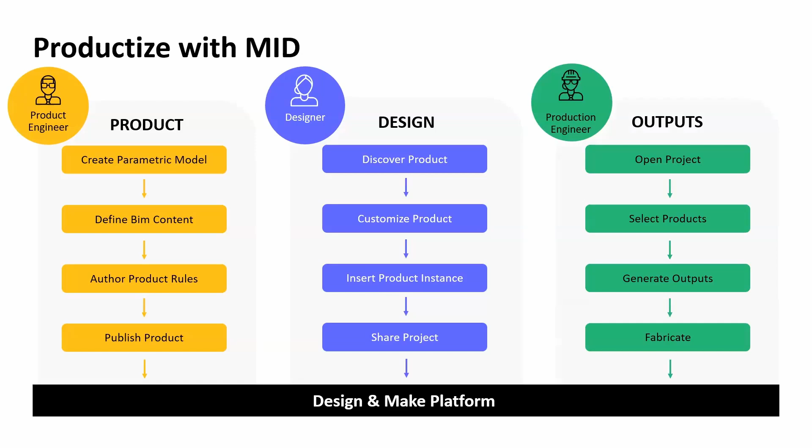So from product engineer, let's say this is from the Inventor side. We just create our model as usual, define BIM content, make sure all the rules of sizes, and publish it. This is where Revit will open up and use our equipment, and this is where production will open up the completed, approved projects and start to manufacture.

So Autodesk Informed Design.

Example, this is in Inventor. So let's say in Inventor we want to create a parametric model. Inventor comes with all this parameter, so all these parameters you can control. You can control and make use of this parameter by creating a form.

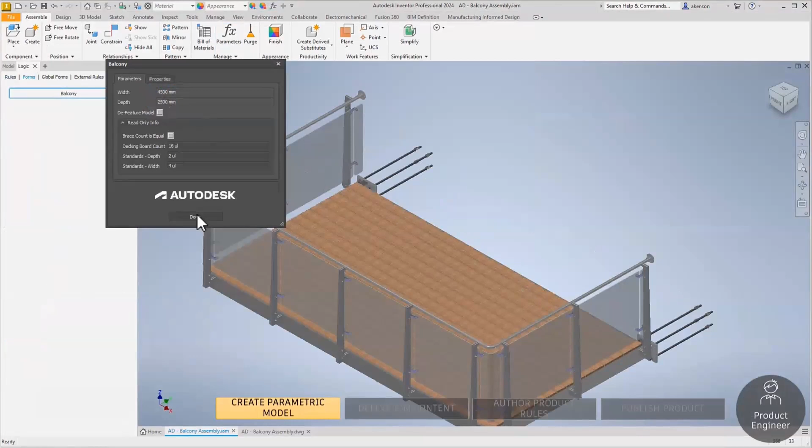Rules - so let's say I change the width to 4,500, it automatically updates. Change the depth, it automatically updates. We can set many more things in Inventor. So from there, all the drawings and details will also get updated. That is the design automation part.

So we want to send over this automated model into Revit, so the Revit model can change in size themselves. The process is pretty much similar, where we need to specify where is the connector, what is the type of models.

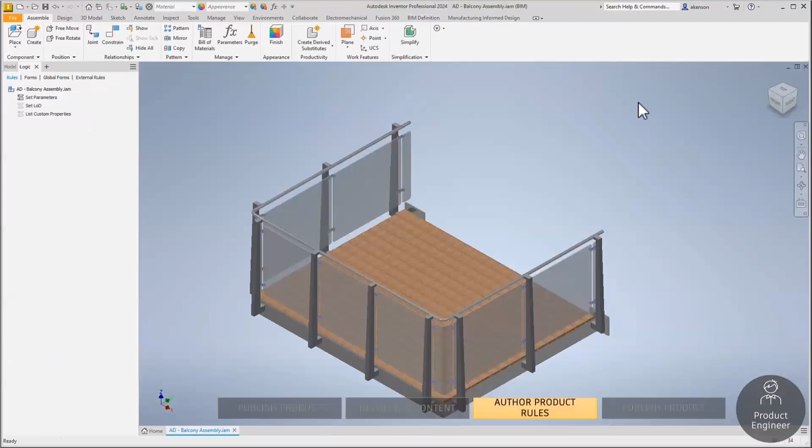What is the parameter we want to control or send over to Revit? Maybe we just want to let the architect change width and length only. We can control whatever we share with them, and we can also share the drawing in case they need it. This is all the parameters - we just give them width and depth only, they can only change width and depth.

So this is a kind of graphical rules. Example: minimum depth is 1,000, and maximum depth we can specify as 5,000. So they cannot go over these rules. This is just like rules for width - what is the minimum, what is the maximum - so they cannot just change it to whatever they like.

And then the rest is just like logic rules.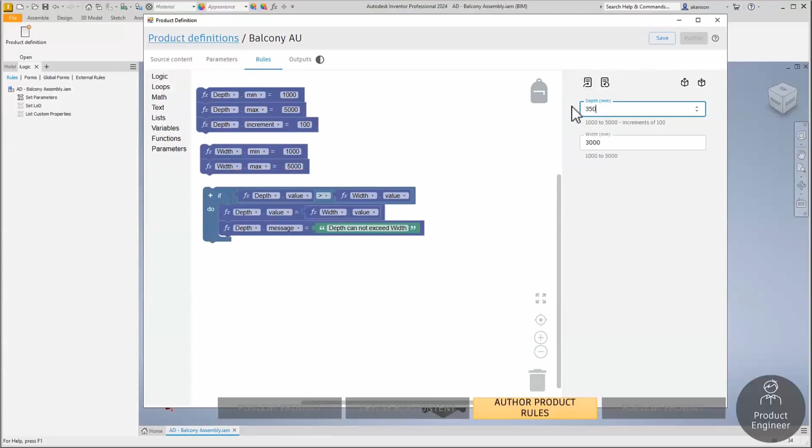So let's say they try to go over the value. We set some rule that depth cannot exceed width. Let's say they want to make the depth longer than the width, it will show an error.

Okay, and then we just send it over. So output is where we send it over to BIM, and also PDF files, and bill of materials. Do you want to share bill of materials with them? What is the neutral format we want to share in this package?

So publish and send over, just put some names, put in some locations. You can specify your own folder structure, and we send it over to the architects or the Revit modeler. So this is one after we publish.

So next from Revit, they just open it up and reuse it. So let's say in Revit, they just open up Revit and insert the components or equipment that we sent over just now. Let's say it's a balcony - it's a modular frame. So this modular frame, send it over and place it into Revit.

This comes with size, where also we have some balconies. Now I want to insert the balcony we just created. So we customize it, so we can control all these values.

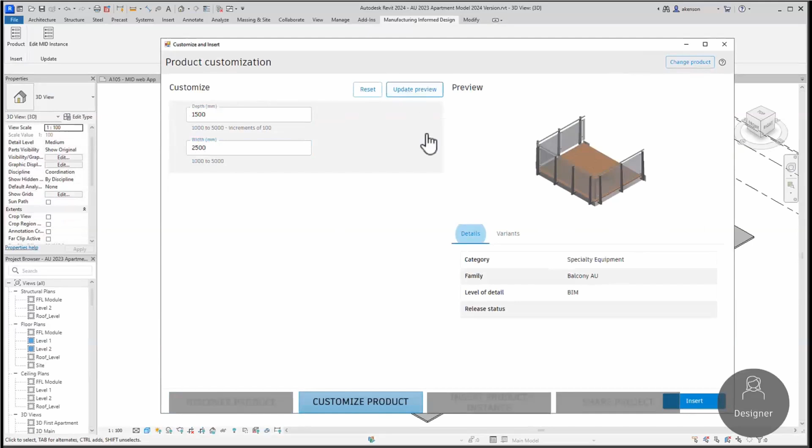Previously, we sent one static model. Now we can send models with sizes, depending on how the project coordinations work. Sometimes you just need to send a static model, sometimes you want to make sure the receiver has multiple options. So I just add in the balcony we just created.

So it's there, and if let's say we change the size again, it will also update it. Let's say we edit the size to 4,000 width. Okay, changes already successfully applied.

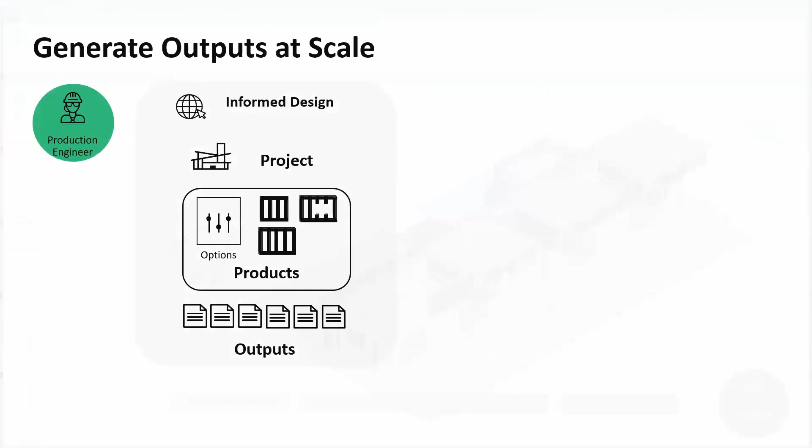So this was previously done in Inventor, and now Revit can use it as variations, not just static dummy models. And then the production engineer will just generate the build, open the project and just create and use

the bill of materials and the drawings to start fabrication. So they can view it over the browser, and then they can view it like this, and they can also download or generate the output from the cloud.

So you can download drawings if they need them - they don't even need to open up AutoCAD. They can just download from here, view and download from here, and use AutoCAD to view and start with production. So this is a bit towards project management or data management as well - everything is centralized in the cloud.

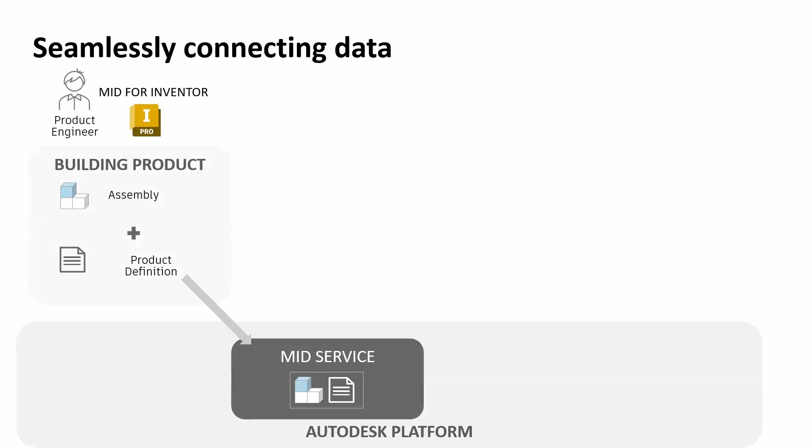So from Inventor, we're connecting to this one - Manufacturing Informed Design - to building model, building design, with too much detail. So everything is connected across the whole life cycle.

So next comes the part about collaboration or coordination of files. In a project you work with multiple files - not just AutoCAD files, not just Inventor files. People are probably sending you many file formats. So if you have Navisworks Manage, you can handle this, because you know how a 3D model file is a bit heavy sometimes - Navisworks can help make it lighter, easier for review purposes.

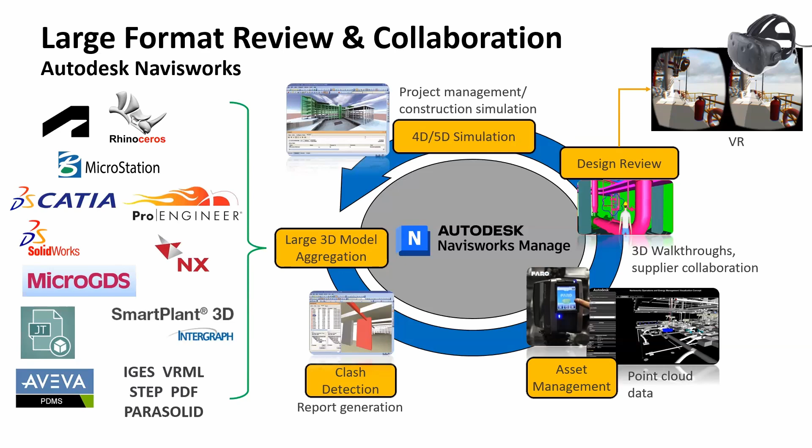You can also do clash detection, where you can run the whole project to automatically search for clashes, and also project management for construction simulation or project simulations, and also for design review. This Navisworks Manage comes with the product design and manufacturing collection - so if you have that collection, you already have this. This is a sample of...

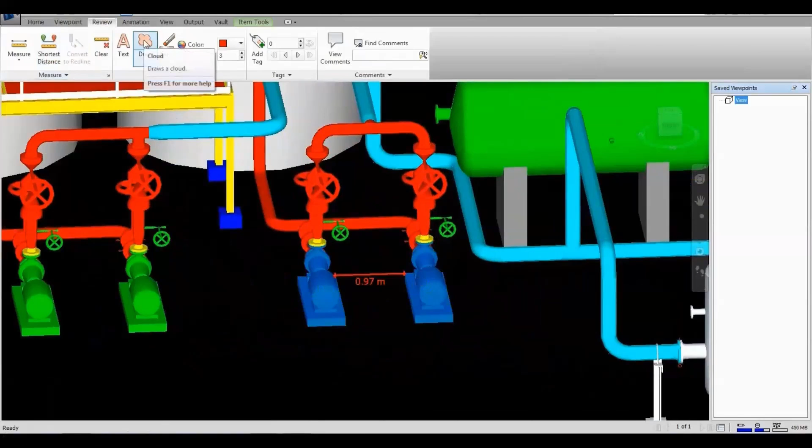Okay, sample in Navisworks - so Navisworks, let's say this is from Plant 3D. And then in Plant 3D, later we can add more, like Revit models or maybe Inventor models, into here. So with Navisworks Manage, we can measure, we can review - this is the lighter version - and we can put in remarks for collaboration and coordination.

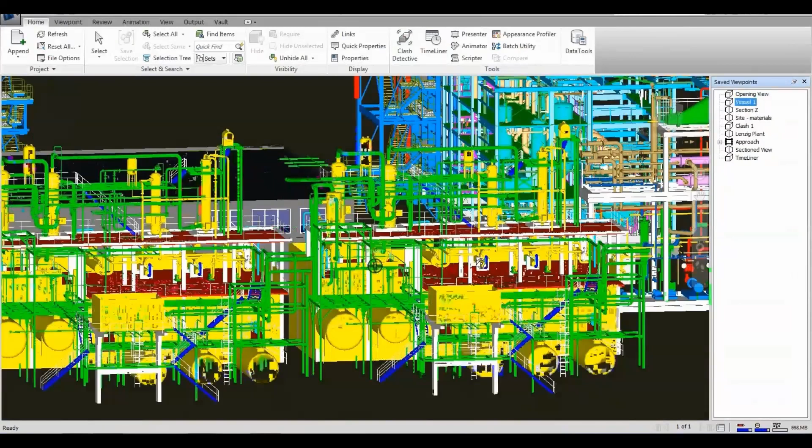We can also do clash detection. So let's say I run clash detection for these files, with a tolerance for detection - it will auto detect clashes. So let's say we can see where the clashes are, we make amendments to the clashes, and we can also create a favorite view, so we can present and show to customers - though the video output, the output isn't so good.

Okay, let's say we detect the clashes. Navisworks will show you where the clash is, and then you go to your design software, Plant 3D or Inventor or whatever application you're using, to make the amendment. Navisworks will not make the changes for you. It will show you where the clashes are that you need to change in your design software.

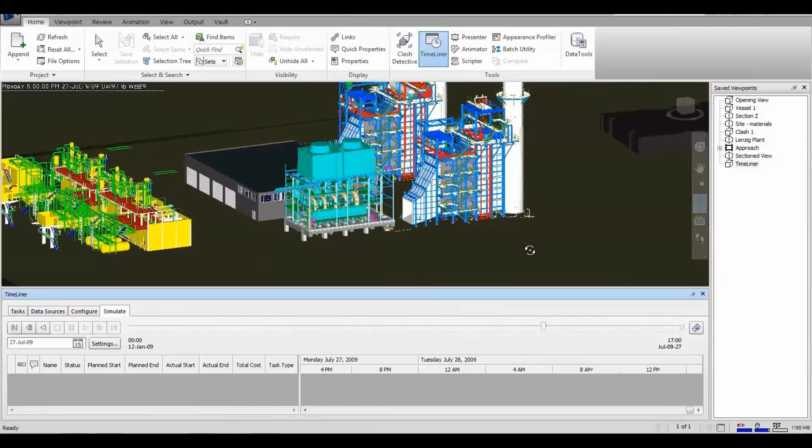We can also do a 3D walkthrough and also a timeliner, a project timeliner, from when the project starts to when the project ends. So we can run the project based on a timeliner. You can also import from Primavera or Microsoft Projects, so you can see how the project timeline looks and estimate how long the project takes, showing simulation of how long the project takes, and so on.

So that is Navisworks. Apart from that, you can also use Navisworks to collaborate. From Inventor, let's say you just go to Navisworks, and then you can use Autodesk rendering from Navisworks. Here you can also take your phone and try to scan. So we'll try to do some collaborative hands-on activity.

You can scan here, so you will see some of the examples that have been shared and that I already shared on the cloud. If you attended my session previously, you've probably seen this. If this is your first time, you probably want to try. Just use your phone to scan the QR code. All three QR codes have different locations.

Okay, so you can view it like on Google, or at the bottom there's an arrow, right? Four arrows. You can click on that and use your finger to navigate.

Okay, so let's say you already scanned. This is all three locations. Imagine after putting in your equipment into a factory or building. You want to show, instead of a normal image and a normal video, you can use this. If you have Autodesk PDMC, you already have this. If you have Navisworks Manage, you already have this.

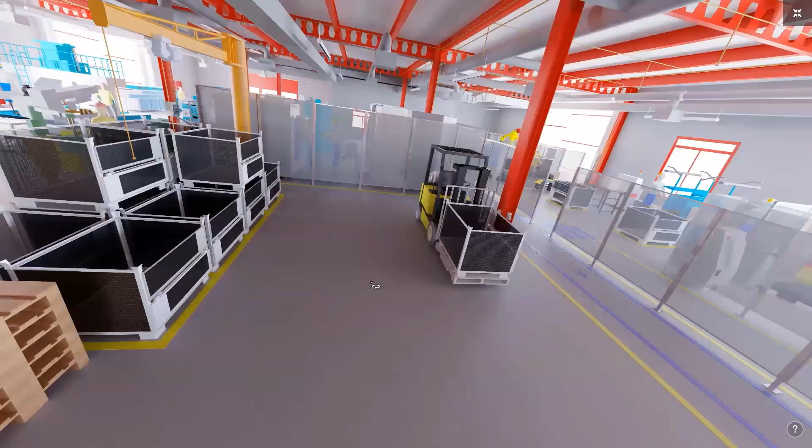You can see, right? This is on a bigger scale. You can also do this for product. Let's say you don't want to show the area, you can also use Fusion or Navisworks Manage to focus on your product only, maybe from a different angle. So you're looking into something like this, right? You can separate it. Of course it's not like a real VR where you walk through, but it can go 360.

You can create a scene and just render it to the cloud, and it's even rendered in the cloud.

So BIM integrations and interoperability: some challenges are where they want to influence product specifications. This is where BIM content comes in, so we send in our equipment as BIM content. Design coordination for workflow interoperability, and construction management for on-site coordination and installation with the resource also.

Okay, so we supply product data in BIM format. We simplify with our Inventor. We produce accurate 3D BIM objects or equipment. We can integrate metadata into our Inventor and send it over as BIM formats.

Okay, so we are at the end of my session. Any questions? Everyone still okay? Too much information?

All right, so in case you're not currently in the industry or in a work scope that involves sending over or working with BIM, maybe after this or in the future you will. So this is a good exposure for you, so you know the solution is already there, because this is where the Malaysia industry trend is moving. A lot of companies are moving towards this because their end goal is to make sure their product can be supplied into buildings, and to make it easier for the building architect or building designer to consume your products.

Some project tenders have also specified that everything needs to be in a BIM friendly format, something like that. So this is a good medium where you use Inventor to bring in all your equipment, all your products from any other third-party software, put it in Inventor, and make it a BIM format. You can even make it smarter with variations and so on. You can also work internally with Inventor alongside other third-party formats and other brands, so you don't have to switch everything over. You can work side by side, depending on how you plan your team and departments.